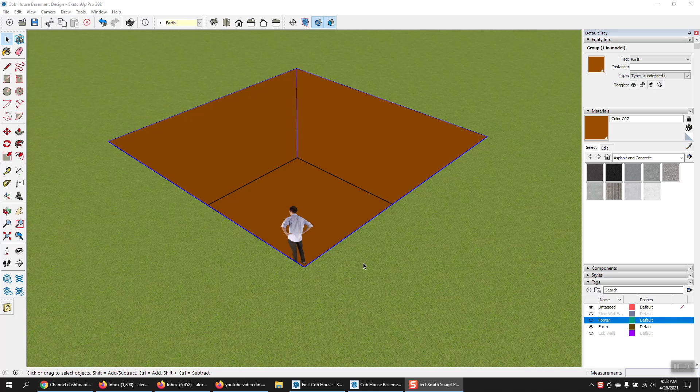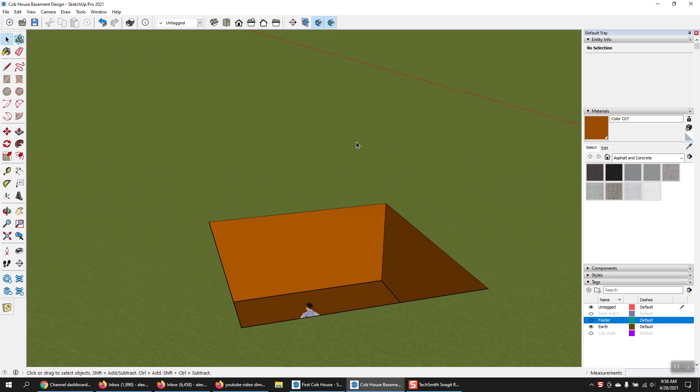Hey guys, so we got this guy here, and he's emailed me with a question, and he's wondering, how do I build a cob house with a basement? So here he is, down in the hole that he's dug on his property, and he's down there just thinking and pondering, how do I build a basement for a cob house with those big, wide cob walls? How's that work? So let's help him out here and show him the answer.

And it's actually quite simple. And if you've seen my other videos on foundation construction or design, you'll understand this really quickly. So with pretty much any foundation, the first thing you start with is the footer. And the footer is typically a little bit wider than the stem wall or the foundation wall. Gives extra support and integration into the ground.

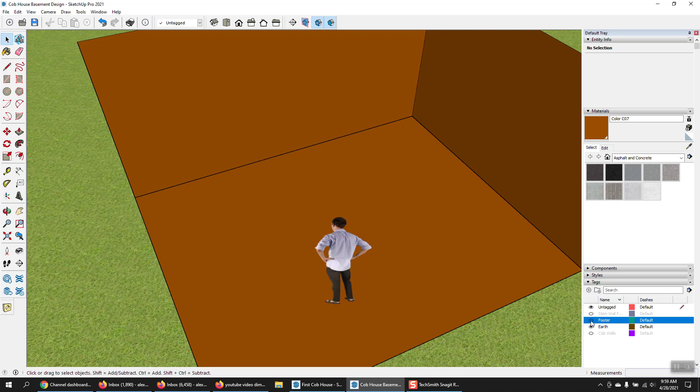So we're going to start off, we're going to place a footer. In this case, it's going to be concrete. Sometimes a footer can be a rubble trench instead, if you don't want to do concrete. But for a basement, I would recommend doing a concrete footer. So here we go. We got a concrete footer down here along the perimeter of his basement hole.

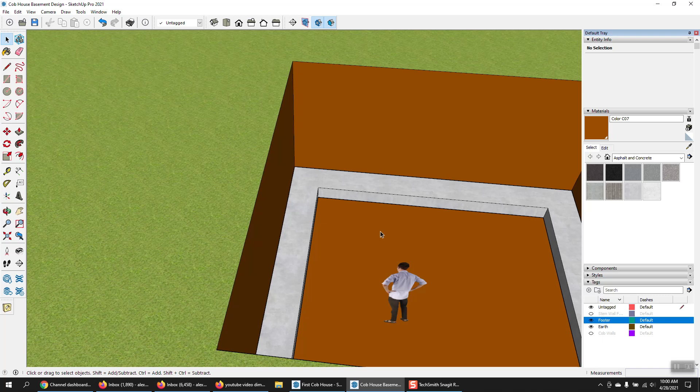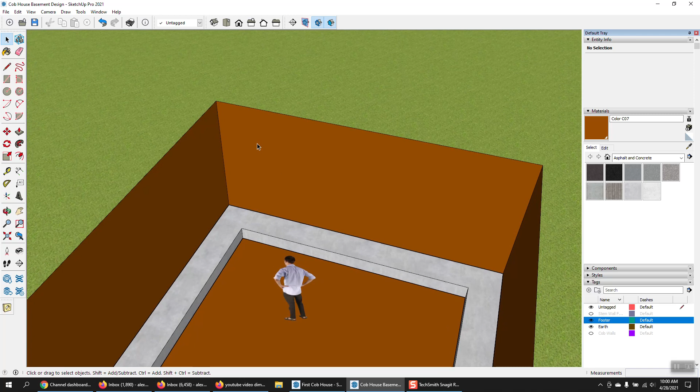And the next thing you want to do is actually place the foundation walls or stem walls. So again, we're going to do concrete in this case. And to reiterate from another video I've done on building underground cob houses, the thing is you can't put cob walls underground. Don't try to do that. There's really no way to adequately protect an earth wall from all the ground moisture that could get to it.

Technically, if you're in a desert or arid climate, you could maybe get away with that, but in general, it's something to definitely stay away from. That's why if you are going to do a basement for a cob house or any kind of earth wall house, the basement portion I would recommend being concrete. All the underground portions should be concrete all the way up to ground level, and then up at least probably 6 inches above grade for your stem wall.

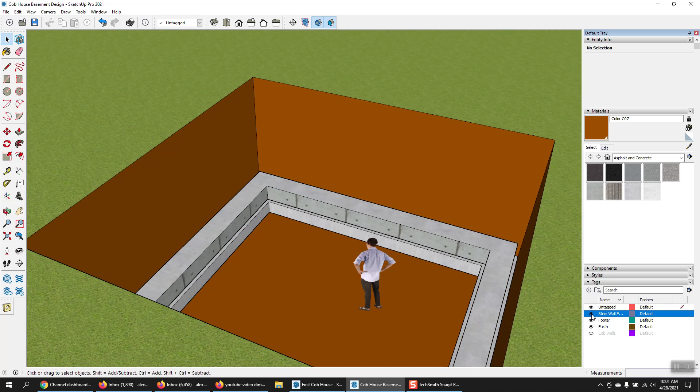I have usually said going at least a foot, but these days I'm thinking at least 6 inches is probably enough. As long as your roof overhangs at least 2 feet, you'll probably be fine with a 6-inch stem wall. But anyway, back to the point here. So we're going to put in these basement foundation walls. Where are we at here? Okay, here we go. So in this case, you can see they've started.

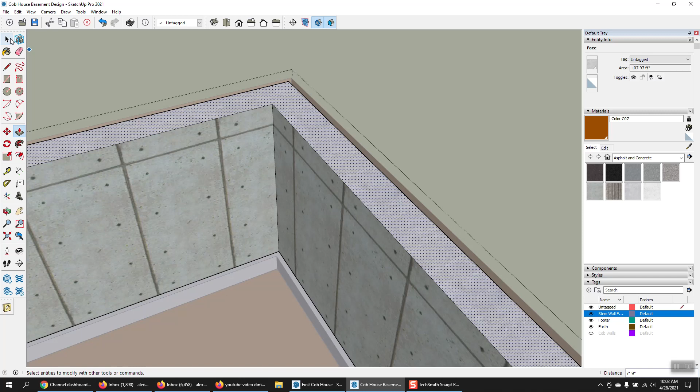And this is typically what a cob house foundation would look like. The footer and then a short stem wall. But in this case, we want to raise this all the way up, because these are going to be the actual basement walls. So we're going to raise that up to there. And this is what the cob walls are going to sit upon. So they are as wide as the cob walls will be. In this case, we have 18 inches. Good standard width for a cob wall.

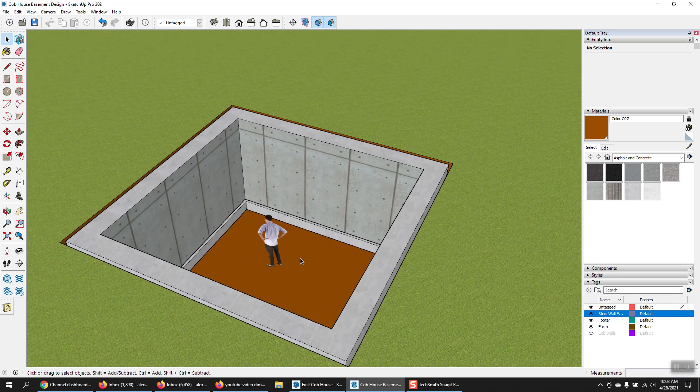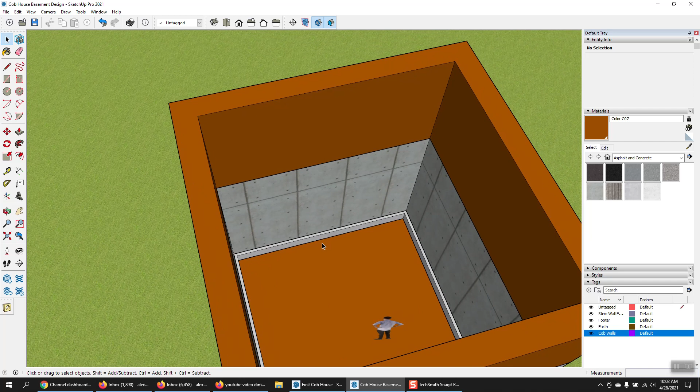So now as you see, there's a basement there, completely enclosed and protected from water. Now I'm going to go ahead and put the cob walls on, and let me go ahead and raise this foundation up to there. Alright, so now there's the basement, and the cob walls rest right on top of those foundation basement walls, going all the way down to the footer at the bottom of the basement.

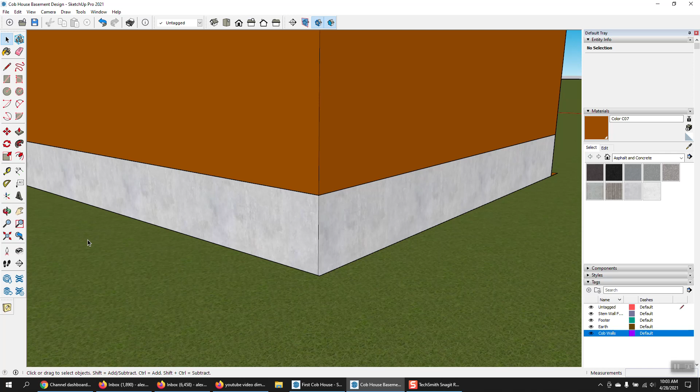So we also have, from the outside, what looks like a typical cob building foundation, where we have a stem wall extending up, in this case, a little over 2 feet, just a little high. Don't really need it that high. But this is it. This is basically how you would do a basement for a cob house.

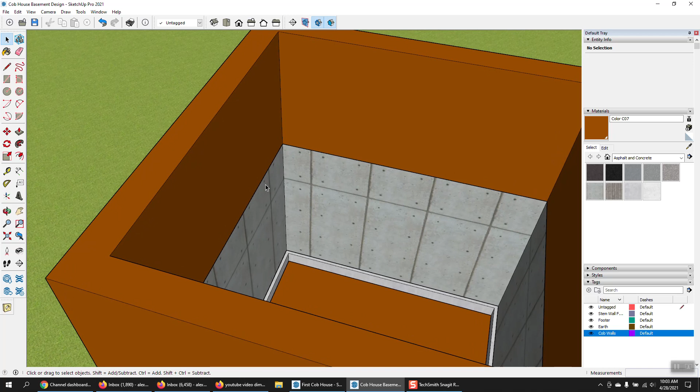And of course, from here, we would have our entrance. We would install a floor prior to actually building these cob walls; we would lay in the floor joists and all that. And then, of course, you'd put your stairs down in the basement, and you'd have a 2-story building, 1 story underground, 1 story ground level.